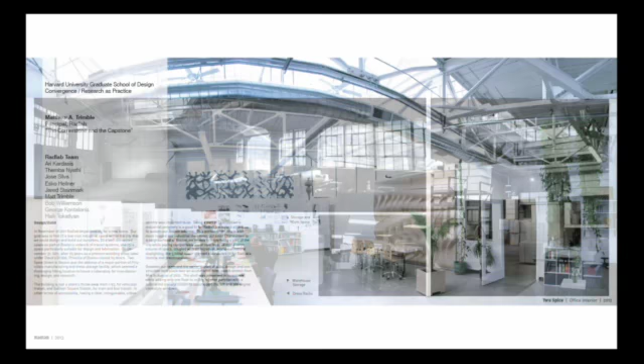The first image I want to show you is the history of the office. We're currently located in Charlestown, and the space we're in used to be a dress factory—it was where Priscilla of Boston was located for about 65 years. The building is roughly 30,000 square feet, and we occupy about 3,000 square feet of that, which used to be basically the storage, the excess space for Priscilla of Boston.

If you look at the upper left image, that's currently our studio. The big opening in the center of the image is a big white garage door that rolls up—this is where we enter the space. Above that, there's a clerestory kind of push out in the roof that brings in light from all the way around the space. On the right-hand side, you see a lot of the storage of the previous tenant in the space.

The way we decided to occupy the space, because we are an office so concerned with issues of fabrication and making, was to subdivide it according to a studio, which in many cases serves as a buffer between areas that can have dust and areas where we really don't want dust. So we have these four compartments within the office that we use to move back and forth quickly between design and fabrication.

We have what we call the clean lab, which is on the end of the office—that's where we do things like laser cutting, thermoforming, electronics. We have our design lab, or our studio, which is the red space. That acts as that buffer, and that's where things like the bathroom, the kitchen, and workspace happen.

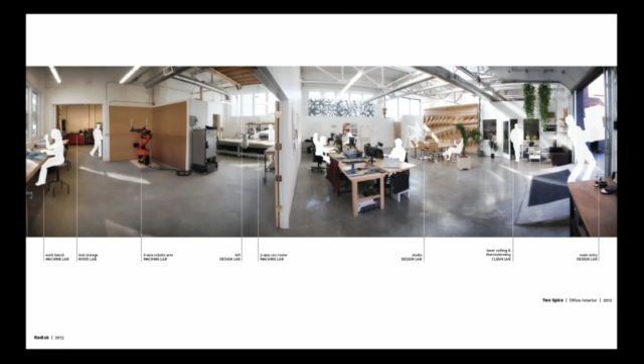So the wall that you see roughly in the middle of the image is dividing the fabrication space on the left and the studio space on the right.

So there are a few very bite-sized experimental projects that I'll show you that give you a taste of how we view the office. It's sort of a posture about the kind of work that we do, but more importantly, the kind of research we're interested in, which is an ongoing constant wrestling with materials, with machines, with design techniques, and all of the above.

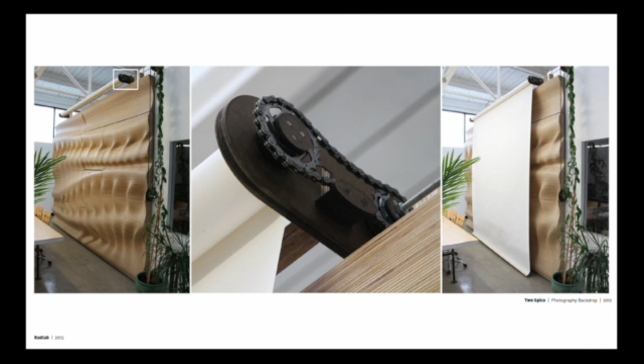So the first thing is a screen, basically a photography backdrop made out of entirely found materials, and by that I mean every single part of it. If you look closely, the top is made out of machined masonite with a bicycle sprocket and bicycle chain, connected by a threaded rod to another sprocket that goes down to a crank. This enables us to use a very large piece of rolled canvas paper to view projected work and also serve as a backdrop for photography.

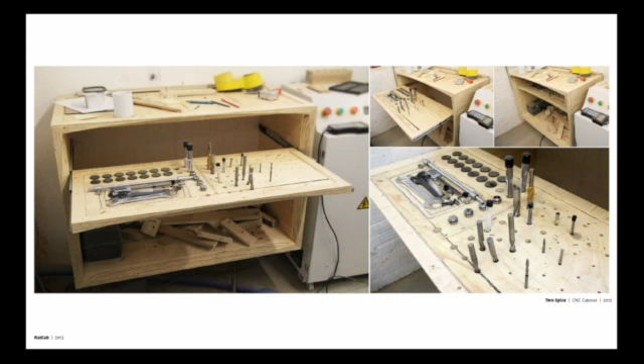Coat rack, a CNC cabinet that we can store things like collets, bits, tools, cabinet space, storage space for shelving and books.

In conjunction with this work, we've been seeing more need for material samples that demonstrate the materiality of parts that are birthed through the process of digital design processes and fabrication. So I'll show you 4 quick samples that are all material manifestations of the same digital model.

This is white oak that you're looking at, unfinished. This is Baltic birch with a water-based polyacrylic. This is MDF, one side unfinished, one side painted with a primer filler and an automotive paint. And then American birch with an oil-based polyurethane.

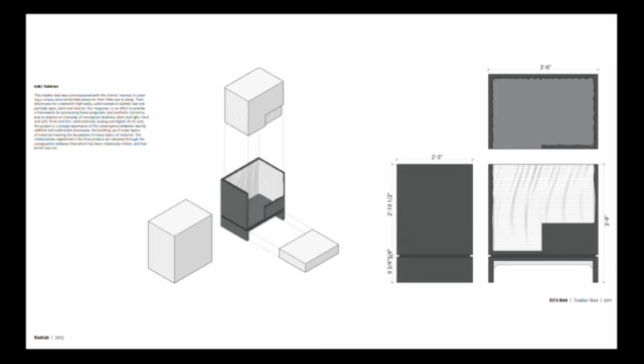The next project is reused materials. This is all kind of reclaimed plywood that we used to make a toddler bed for a client. The idea was we were pairing reclaimed materials with a research agenda we had about testing one of these machines to understand really its benefits within the context of architecture and industrial design.

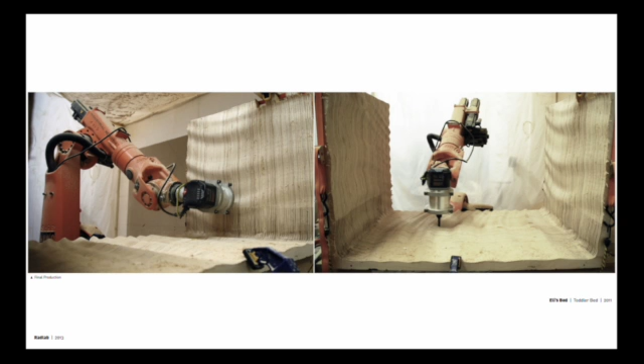So the idea was to force this machine to do what none of the other tools we had at our disposal could do, which was machining the entire inside of this channel at once. So pre-assembling the parts and machining it in one go so you get maximum clarity and continuity in the materiality of the final product.

Next project is a competition that we're working on currently. This is for the Fort Point bench. We entered a competition that you may be familiar with in the Fort Point channel. Design Museum Boston is hosting it. The materials that we used are all reclaimed, used materials, from this paper mill in Holyoke, Mass.

These are some of the materials that we looked through, all reclaimed from the paper mill that actually caught on fire last March. The building was unoccupied for years, it was dilapidated. They demolished the building, but they saved a lot of the spruce joists that at this point are about 130 years old. And that's the material we use to make our bench.

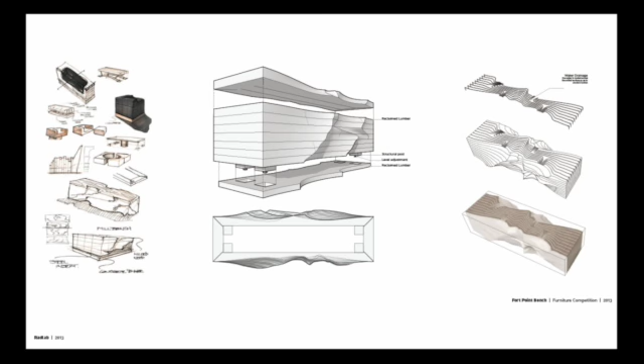Really beautiful material. The outside of this material has been aging forever, so it's got this very dark finish. But then when you go and start machining that wood, you get a much softer finish. So we thought it would be interesting to explore that, looking at things like erosion and thinking about starting with kind of the solid prism, similar to the previous piece of furniture, that you sort of erode from to arrive at the final product. This gives you a sense of the process.

The next bit of research has to do with panelization. We're basically thinking about two lines of thought. One is we have a predetermined piece of geometry—it could be anything, a doubly curved surface or a flat plane—and we want to describe it with flat panels, coming up with a way of solving that problem through algorithmic means. The other is a notion that you can take a set of parts that, if they have sufficient flexibility, can make virtually anything: a set of pieces with dynamic mechanical joints that enable a designer to actually create in real time with the physical parts, rather than having a predetermined solution on hand.

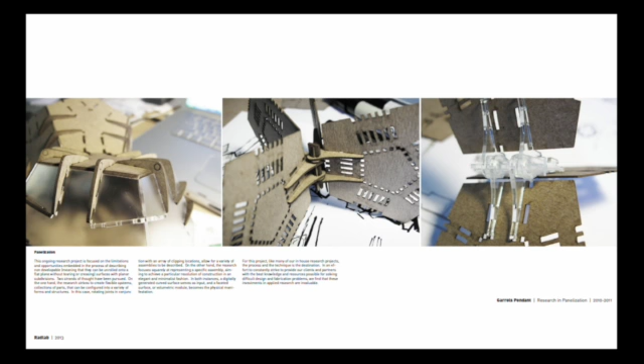These images show one manifestation of a system that allows for flexible joining and clipping in multiple locations so that you can configure in an ad hoc fashion. These next images show basically the idea of a preconceived form, volume, or space that you're trying to define using these flat stock materials.

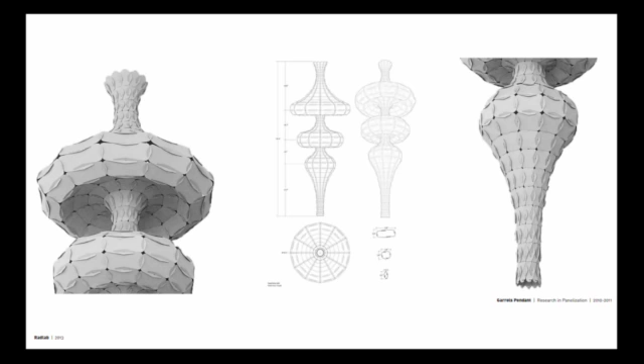Massive data sets come from pressure sensors in an athlete's foot. They're working with Olympic athletes, bringing them into their biomechanics lab and trying to understand how they run and how their foot hits a surface based on the specific nature of their body.

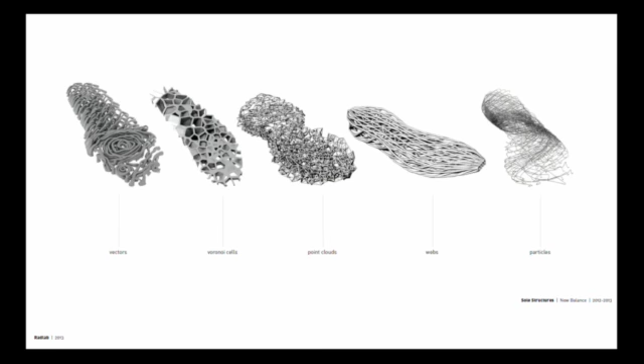We're taking those data sets and looking at a variety of lines of research that enable us to infuse form and structure with information. So from the left, you see the actual field of pressure points that have to do with vector force and direction, and that enables us to think about how to make something that isn't just giving lip service to performance-based design, but actually doing it.

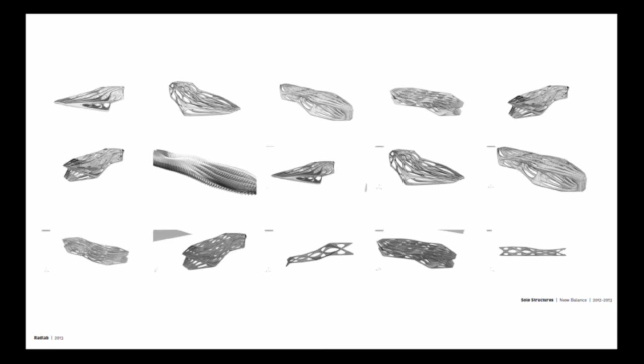The first one was based on particle systems. This is based on a more web-based system, which is particularly interesting because we're trying to work with New Balance to think of ways you can use 3D printing to develop techniques that can be made in no other way. For the last 100 years, almost every shoe in the athletic world comes from injection molded processes. So we're taking 3D printing parts inside of parts that have no physical connection—only when they collide with one another do they provide resistance.

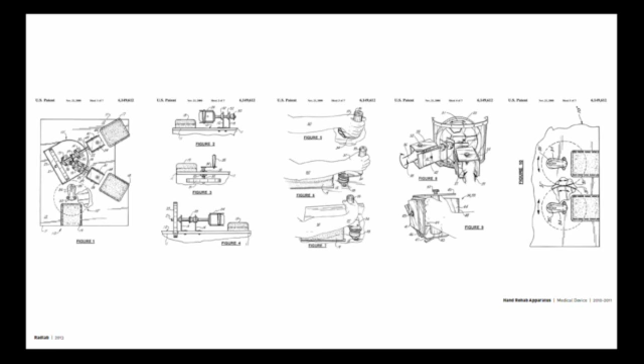A series of medical device bits of research—this is a longer one, but I don't really have time to go through it. We're working with patients who suffer from two specific conditions, one more narrow than the other: reflex sympathetic dystrophy, which means basically you have an impaired hand and a healthy hand, and you want the healthy hand to be participatory in rehabilitating the impaired hand.

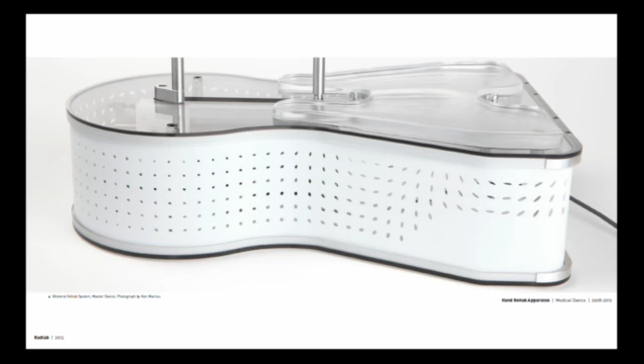So we have 3 patents filed on this technology that we've developed, and we have a project, a new prototype, that actually was just finished very recently.

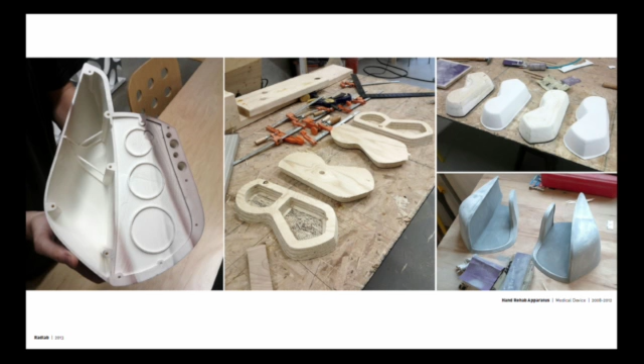Could I cue? Never mind, we don't have time for the videos. I'll keep going—a lot of the fabrication was done in-house.

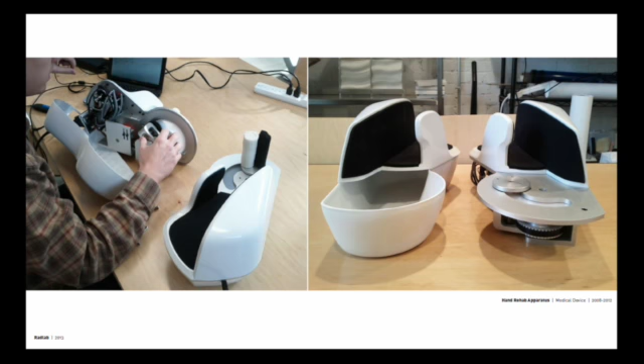We're using CNC machining to develop the molds, vacuum forming casings for mechanical parts, electronics, and technical drawings for the patent.

Finally, just some academic research with a robotic arm that we have. We've won 2 grants with the Boston Architectural College to teach courses with students at the BAC using the robotic arm in our office, thinking about things like wire cutting, pick and place operations, and weaving. This is our office before we moved into Charlestown, back in the seaport.

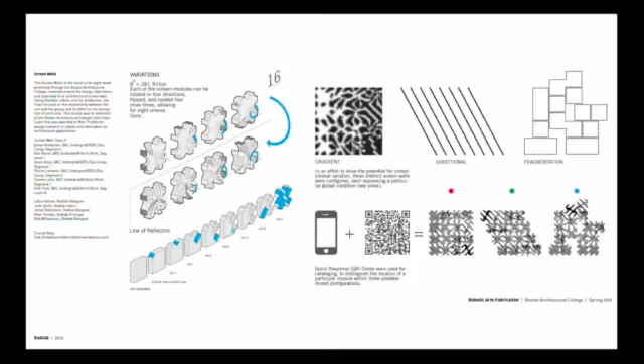A final project—if I could go ahead and cue the last video, video 4. This is a more recent class that I taught last spring, working with students to develop this reconfigurable wall. The idea is you create a matrix of 16 simple panels, and you can reconfigure them to describe very different conditions. We're looking at 3 specific conditions that the video will show.

This research project was actually exhibited at the BSA.

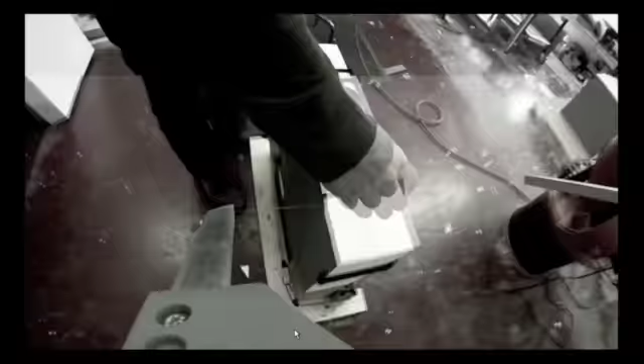So we're working with EPS foam, expanded polystyrene, a highly recyclable material, very light. The wall that we're building is about 20 pounds, so any individual person could literally pick up the entire wall. It's less about the architectural materialization, but more about the concept of this reconfigurable wall and how it can affect and impact space.

So the first configuration is about gradient. Students come back, they disassemble it, and reconfigure it. The way they know how to configure it, there are QR codes on every module. All they have to do is scan the module with their cell phone, and that tells them the configuration that it goes in.

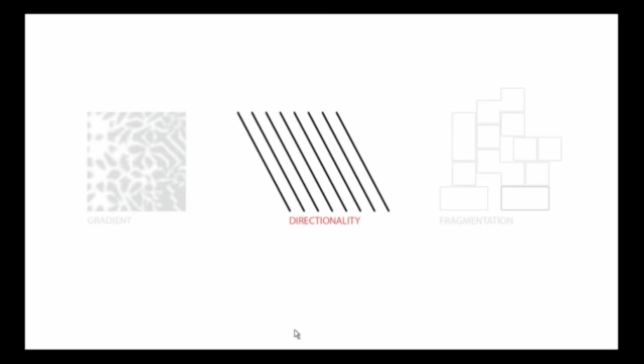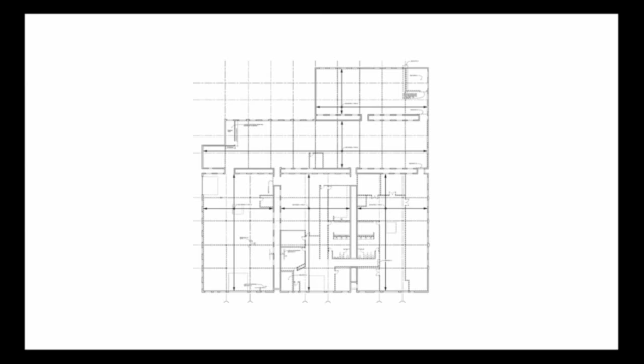It was in an urban setting of a series of warehouses originally pig barns, then used for storage. The two vertical lines at the bottom of the plan show an order, a kind of archaeology that had been lost because it was covered up—basically access points for light and air originally in the building.

However, the building was boarded up. The Mass Commission for the Blind was using it—I guess they didn't think they needed light—and this is what the space was like inside: a rabbit warren with relatively low ceilings.

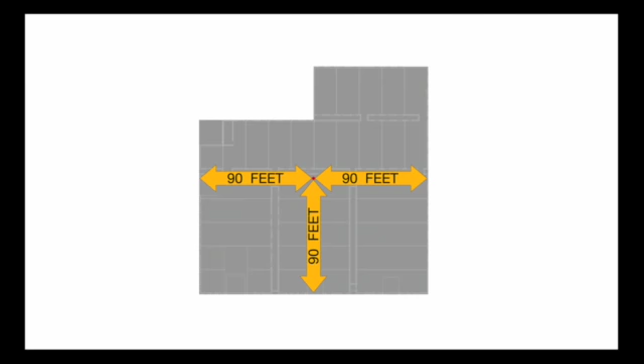One of the basic principles for us in this project was finding ways to connect any of the users with the natural environment—not just a view out of a window, but to experience wind, rain, snow, anything from the larger environment. But the problem was a deep floor plate, 90 feet away from light and air.

So we uncovered the existing order. We removed what was there and replaced it with glass, two 6-foot wide by 100-foot long courtyards, putting anybody in any position about 25 feet away from the environment.

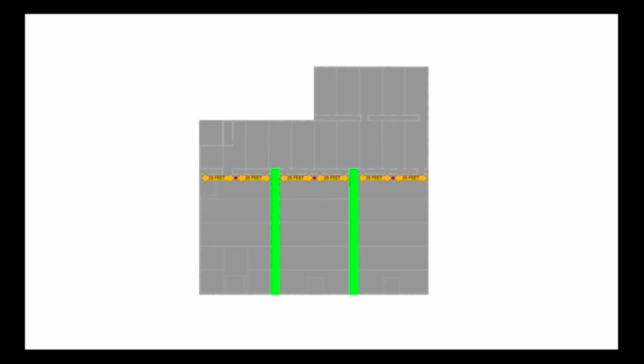I'm going to focus on part of the issue here, which was how to compress the program. This is the result of the incision of these two courtyards into the space to create a kind of opening for it.

Oh, thank you, I didn't see it. The problem—again, one of the conflicts between the desires of the owners and the space required—was...

There was a regulatory restriction: a building moratorium in this area at the time we were building. So some of the spaces they required simply wouldn't fit, and expanding the real estate lease was complex for them and expensive.

This was the second round of interviews, meant to be a quantitative one, which in some ways reaffirmed and expanded on the ethos of the client. It focused on function—the relationships between function, proximity, synergy, technology, and social order or social hierarchy within the project.

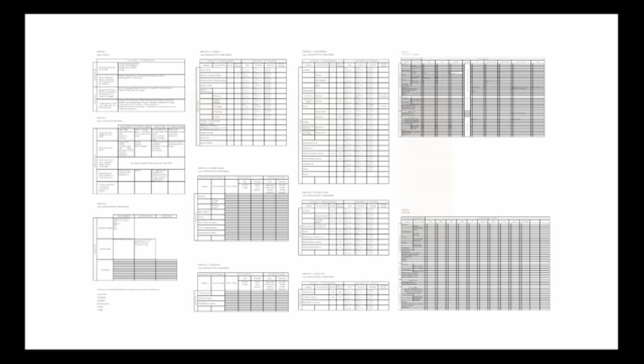So these were distributed and filled out, then interpreted by us. In the acts of compression, of which there were many, one was to take these three requirements—a library, the think tank, and an auditorium, represented by these blocks showing their relative sizes—and combine them through research we had done on the functionality of the rooms.

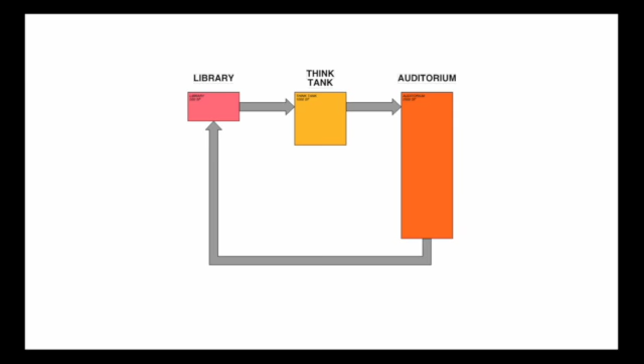We understood ultimately that none of these were going to be used simultaneously, so it afforded the opportunity to collapse these into one space, basically, and then that spun off a bunch of other problems.

The size of table that they required for the engineers was much larger than we could get in and out of the room. The solution to this was to create a room, and the table you see is just an industrial design aside that was in response to allowing this to work.

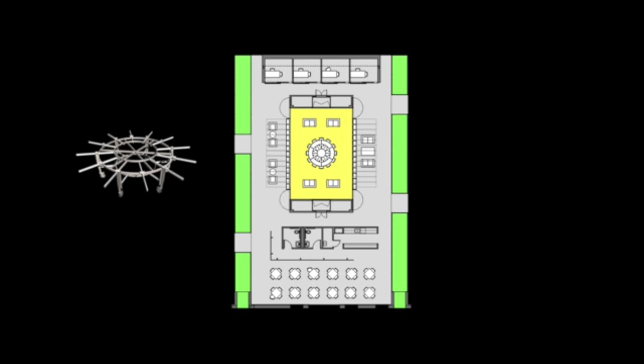By combining these, we had to do two things, since the size requirements were different. So what you see in the center is the think tank space where 12 engineers sit and imagine the future. On the outsides, combined with circulation space, are 30-foot long, 6-ton walls that carry the books.

So in trying to solve this problem, we had an idea about just moving the walls, right, and creating a larger space, an auditorium for 100 people.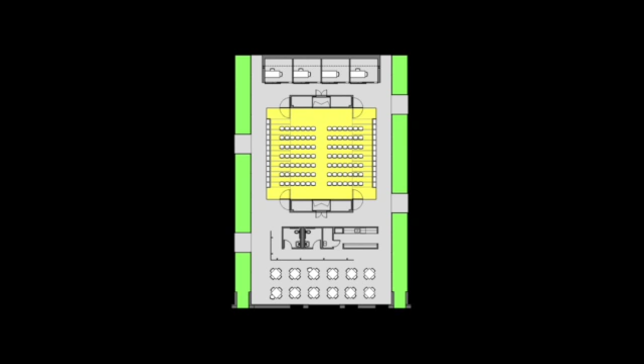In any of these events, the folks who would be involved in the think tank would necessarily be involved in any of these presentations, so there was no need to duplicate the spaces.

In researching possibilities here, we just looked at known systems of moving books.

Really? Wow, okay. He said my hair's out of place.

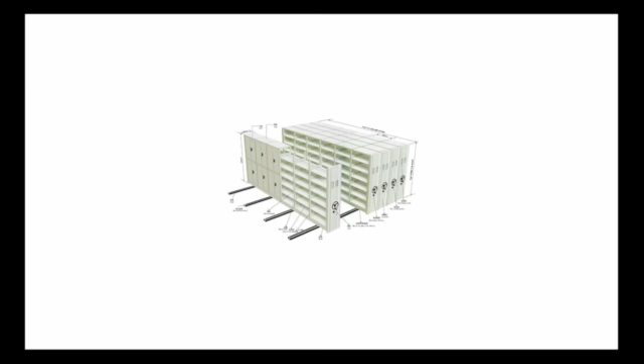So we looked at systems like this, which wouldn't work for us because of the tracks on the bottom. We developed an inverted system to move the wall out of the way. This gives you an idea of functionally how there was an industrial design component and how it transforms into an auditorium.

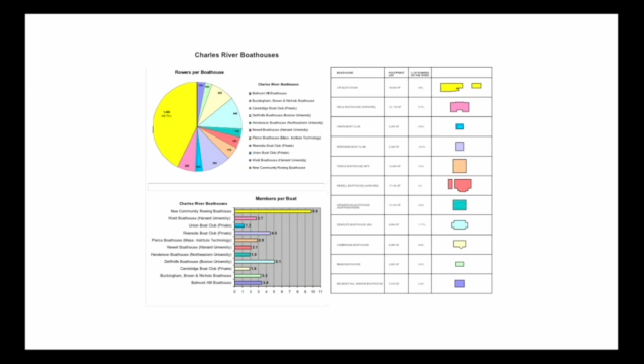In terms of the boathouse, we were confronted with a situation where we were going to contain 42% of the boats and rowers that are on the Charles River. However, our site footprint was intensely narrow and constrained.

The solution involves the large building for the long boats, a glass building that is basically a billboard for the highway of boats, and a public court in between. I'm going to go through this very quickly.

The other issue was the context of boathouses on the river, which the client rejected at the get-go because they wanted to represent a non-elitist function, essentially access to public rowing. This is sort of like the YMCA for rowers, and a first for Boston and in many places.

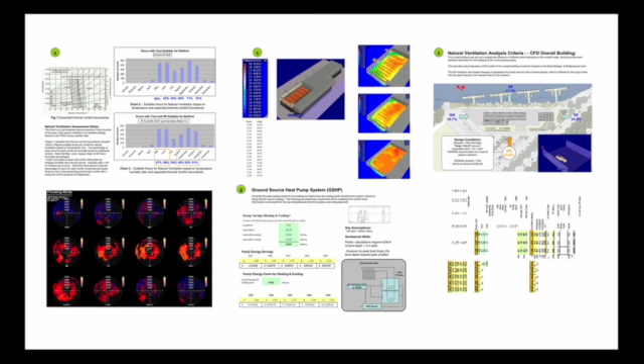Other research, which I'm not going to go through in detail, involved working with engineers, because one of the issues of a long building is drying the boats. I'm going to focus on a couple of items of research, including computational fluid dynamics, wind analysis, et cetera.

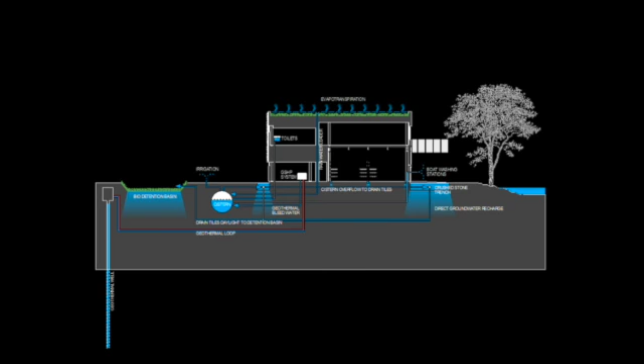Then the development of various systems, including a geothermal well, which maybe we can talk about later, in terms of how the presentation of the information was made to the client in two different ways that incited a decision - a positive one rather than a negative one, which was initially negative.

So we were inspired by a couple of mostly known things: a tobacco barn, which is a long building that dries tobacco; hangar doors, so we could get the boats out the narrow ends of the building; and then the billboard, which was meant to be glass, a Pilkington type system that would allow air to flow through glass.

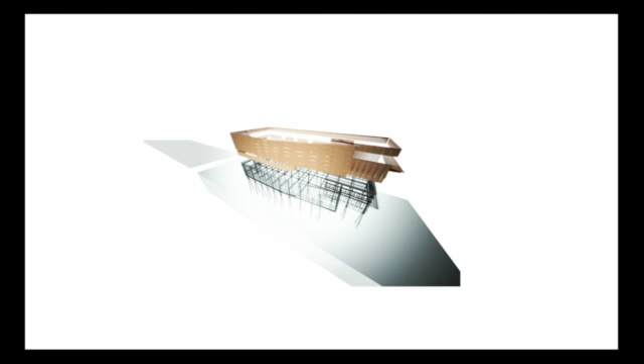The glass building is missing here, but in any case, it's a configuration that's about skin on top of what is essentially a warehouse building. So these are the developments. The Pilkington system was much too expensive - it's a relatively modest budget project.

So we developed a different way of assembling the glass, allowing air to flow through both underneath and between the panes by extruding clips so that we could cut them up instead of machining them or casting them. That's the result - we get our billboard to the highway for the small boats.

The inspiration from the hangar doors got us thinking about how the skin might be entirely dilated to allow air to move through the building and dry the boats. But we developed a rather low-cost aluminum system that allowed for doors that don't need to open as far up as a hangar door would.

Again, the components here were a rather lengthy design so that both of these went through the same extrusion. One piece is cut off on this one and then flipped over so that one extrusion works as both the moving part and the receiving part, which gets us this - a building that literally changes form. This is actually a retrofitted hangar door, modified slightly.

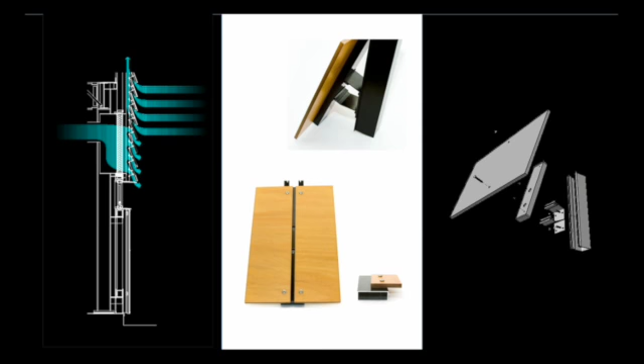In the case of the louvers, the function was to protect and cool the south wall, to allow air to escape from the hangar side, and to mask windows on the locker rooms facing the parking lot. The challenge was achieving a precision in architecture similar to a crafted building, while understanding that those building it would be installers, not craftsmen. So while these are simple pieces, their development had everything to do with extrusions that were cut but allowed movement vertically, horizontally in the clip direction, and twisting in the tube direction to allow perfect installation. There was even a small tool developed that fit into the slotted hole, forcing the screw to go into the middle, so that an unskilled laborer could install and achieve that kind of detail. Thank you.

Thank you, Alex. The next speaker is David Mah. David is principal and founding partner of Asensio Mah, a multidisciplinary design collaborative active in architecture, landscape design, master planning, interior design, and installations. The firm's recent projects include Surface Deep, an experimental moss garden wall in Grand Métis, Quebec, and Q House, an exercise in maximizing views and daylighting over a parcel in northern Spain. David.

Okay, so I guess when I was first invited to the conference, I was a little perplexed because in many ways I found it hard to say that I have a deliberate consistency in the way that we practice and the things that we do. You can see in the last two speakers a very clear consistency, one looking specifically at material research and another looking closely at architectural issues.

But for some reason, this is just a general list of things that both Lady Asensio and myself, both parts of Asensio Mah, have had to do over the years. It reads almost like a CV for someone with ADD, a mixed bag of everything from stage set design right up to airport and landscape master planning consultancy strategies. These are legitimately things we've been asked to do as Asensio Mah. So within the practice, it was hard to articulate a consistency, but perhaps all those conflicting issues we've had to deal with is a kind of consistency in itself.

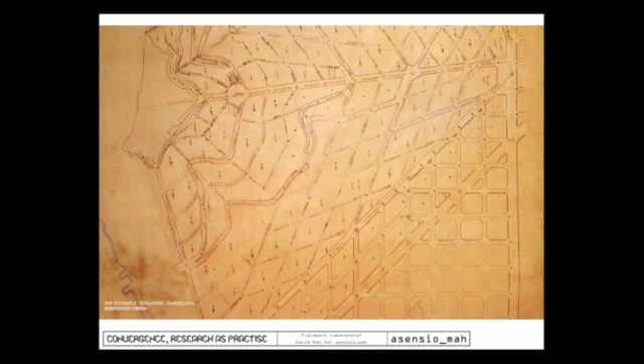We were also at the time very interested in looking at how new kinds of media would inform that search, that research, and also later on informing strategies at a larger scale and landscape scale, and how you might actually territorialize based on kind of adaptive techniques.

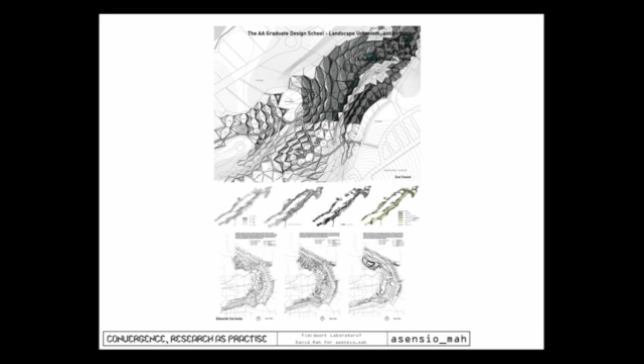This culminates, to some extent, in the kind of things we got asked to do. This is an exhibition done by the Storefront for Art and Architecture in New York recently to celebrate their 30-year anniversary, I think, where they invited 150-plus architects to take an existing New York plan and rethink it.

We were given the Mangin and Goerck plan, and we thought this was the perfect example to take all of that hard work and research that we had incubated at the AA and use this as a forum to be polemical with it.

The Mangin and Goerck plan is an early plan that was a kind of survey the city gave to these people called Mangin and Goerck. What it actually did, beyond just surveying the existing conditions, was use it as an opportunity to project how Manhattan might grow further north from its existing condition.

You can see in this case it was a bit different to the Commissioners' grid, in that it wasn't an imposition of an idealized or optimized condition, but really was trying to work with existing alignments, existing orientations, and together weave a kind of resulting whole from that.

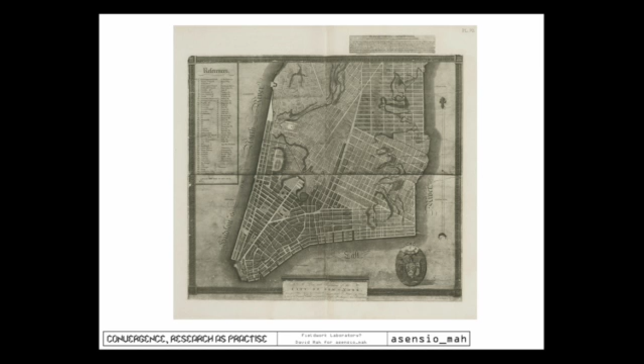We tried to use it, remembering this was an exhibition where they told us you could only spend 10 hours on the drawing, and it could only be done with one drawing. So we tried to make it as explanatory or expressive as possible.

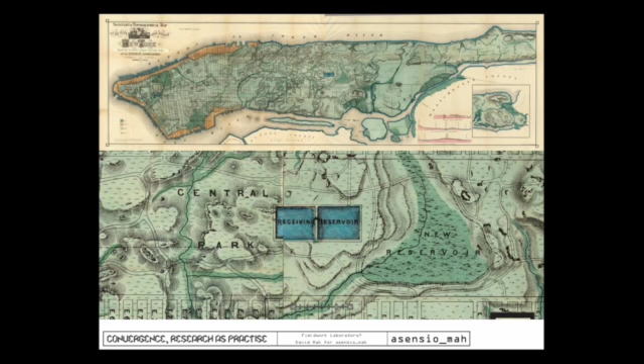We looked at the possibility of presenting an alternative urbanization of Manhattan that took into account all the existing qualities prior to its urbanization, looking at the watershed patterns and the topography as inputs to drive the grid in many ways.

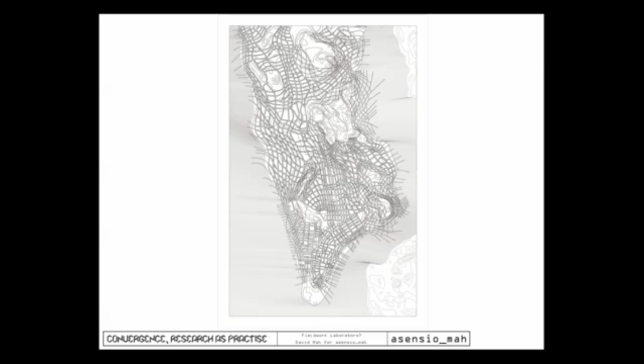It basically gave us something that unintentionally was to some extent shocking, but it becomes a kind of polemic device to talk about how, when you're addressing the issues of adaptation, in many ways you go away from the issues of optimization. Adaptation actually produces very specific, very idiosyncratic moments in an organization, and we thought that was an interesting way to describe it through this manner.

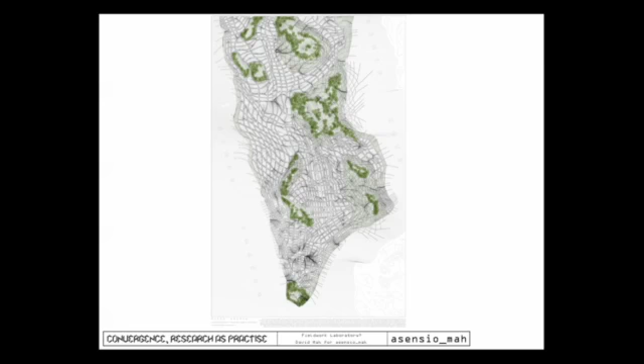Another forum where we were able to deal with the issue of adaptation in a different way was in this single-family house project we were commissioned around the same time as teaching in London, in the north of Spain. This is for a new urbanization in the periphery of a town in the north of Spain.

You can see it's a pretty generic subdivision, just equally divided parcels, and all the buildings basically fill out their setbacks and consolidate them as a single volume. In our particular case, doing all these kinds of things at the same time can't help but affect the way you approach the design process.

Rather than looking at this purely as a building that's a result of molding an object, we wanted to work directly from the existing given condition of the landscape, to some extent treating the building as a way of adapting to the landscape. If you look at it from the top it's very hard to read, but there's actually significant topography on the site.

Basically there's a 6 meter grade difference, roughly 20 feet, between the upper corner of the site down to the lower end of the site. And for us, but typically what they do in these subdivisions is they simply level out the parcel and consolidate the building as much as they can into a volume. Basically that's the result of it.

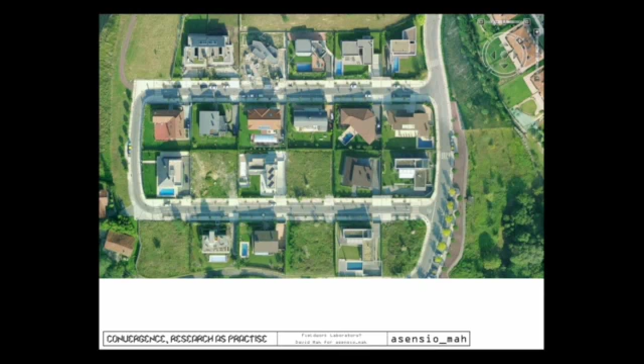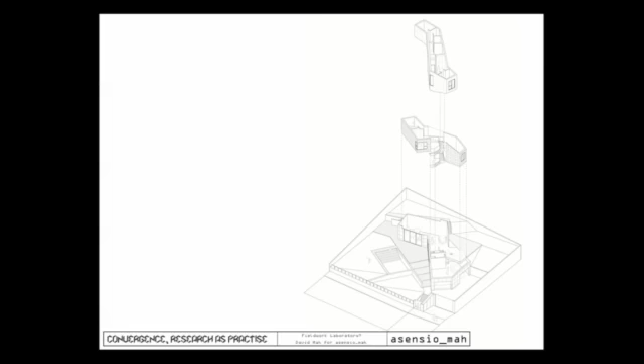So what we did in this case was really look at working with the ground, basically playing with the 6 meter difference and using that as a way to organize the program of the house. There's a grade change from the top right down to the bottom, and it reconfigures itself into a series of terraces rather than leveling out the whole parcel into a flat plane. Accordingly, the building needs to accommodate the program and position itself at many different points on that shifting topography.

This is the kind of resulting organization that comes out of that. This plan is probably not the most accurate, but it shows you the progression as you move up through the house, basically a progression that works with the topography, as all of these volumes are sitting on different levels of the site.

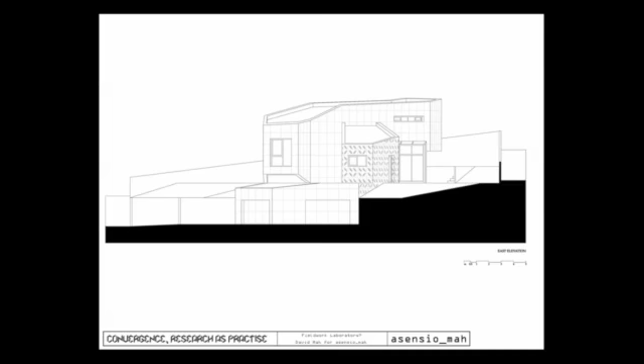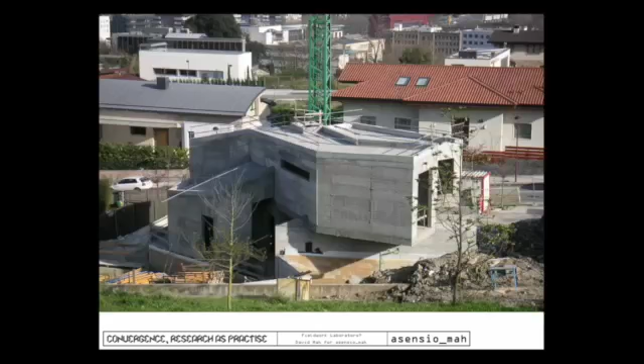So these are some sections that show that. You can see here that rather than distinct levels, you produce a series of split levels that allow for interesting continuities through the building vertically, and we try to orchestrate quite explicitly continuities between the landscape and the interior.

So you can see these are some of the views of that. What we try to do very explicitly by working with the topography is create these different platforms and distinct parts of the garden within which there could be a dialogue or collaboration with the interior of the house.

This is a view from the street and some detailed views of that.

So there was basically a hunch that working with landscape in a very explicit way, and with an ambition toward adaptation, could produce a new kind of type, to some extent, or at least a new approach to the issue of the suburban house in this subdivision. These are some details, but yeah, just to show them.

In many ways, the question of how these things inform each other—we also wanted to start basically in parallel. We also taught in this case, and this was a particular moment where we actually moved to the United States, and we started offering upper level, graduate level research studios.

In this case, we were very interested in this issue of the suburban house, and the way in which a much more concerted, focused collaboration between looking at the volume of the building and the way it works with the parcel boundary, or the plot, could actually yield more interesting lifestyle platforms or more interesting configurations—that was something we wanted to look at.

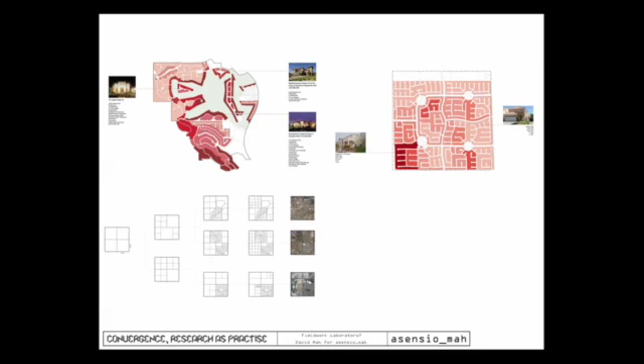So at the time we first came to the United States, we started to look at what, for us, was probably the epitome of the lifestyle economy center, which is Las Vegas. We had a research studio that looked closely at the mechanics of how lifestyle is arranged in a neighborhood. In Las Vegas, this is called a neighborhood, and that's called a community. The difference between a community and a neighborhood is the neighborhood is optimized, while the community has value added with landscape. We started to look explicitly at the types of market products and how they work with the landscape.

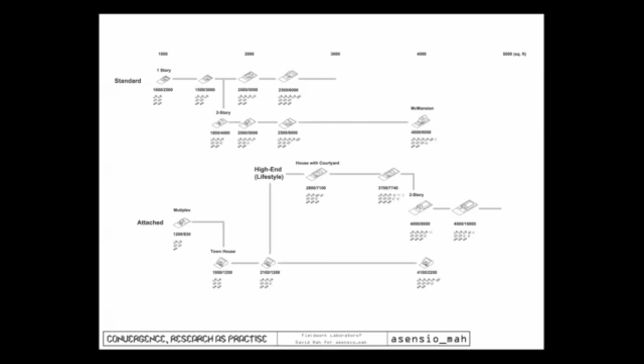So for us, this was something valuable for the studio, and also for us as a kind of research basis for subsequent projects we did. For the students, it was something they valued greatly, and they basically got a lot out of it.

And for us, it also became valuable in terms of approaching specific projects. This is a project where we moved to Australia, a totally different context from Spain. In this case, you don't need architects to do houses—in fact, you need an engineer if you're doing a house.

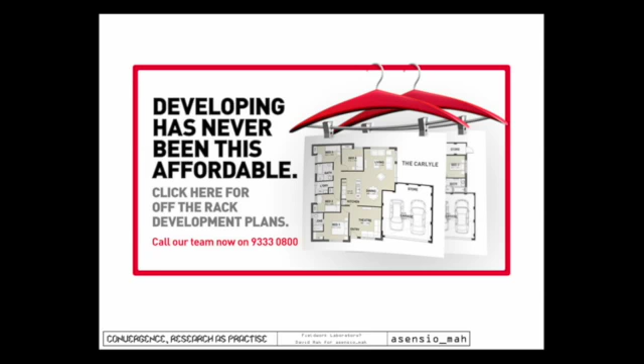So this is a totally different context, and most of the time in Australia, everything is done with standard products. We were commissioned to look at a single family house, but told explicitly that we should look very closely at how standard products are made, so we could match prices and meet expectations.

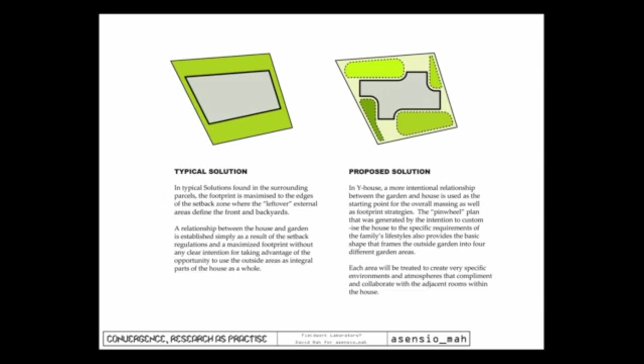So we started looking very explicitly at how standard house products are constructed in Australia—very simple issues. They basically maximize, looking at planning and the relationship to the plot boundary, a compact volume, and whatever landscape is produced is simply a consequence of what's left over. So we tried to work with a form that actually works.

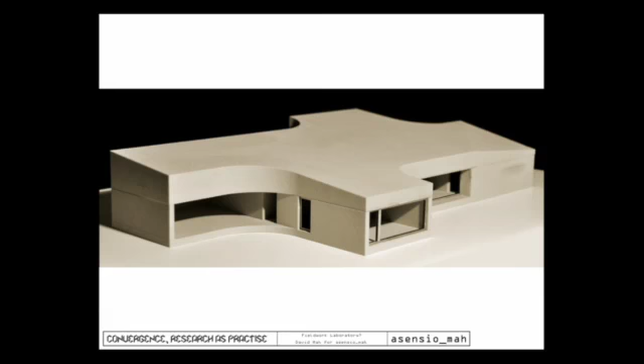You can see a lot of these corrugated edges, which were ways for them to frame certain relationships to the landscape, but in very timid ways—we tried to make that a more explicit move. Rather than maximizing the interior and leaving the landscape as leftover, we tried to increase the perimeter-area ratio and produce a figure that would more explicitly frame different aspects of the landscape.

And the other interesting thing in this project was that, halfway through, a form-based code came in related to environmental performance, which said every single exterior wall had to have an overhang attached to it. That's different from a performance-based code, which would simply let you beef up the insulation or change the material of the envelope.

But in this case it was very explicit—it was driven by a preconception of what the construction industry typically pumps out. To some extent, even architecturally, our only famous architect in Australia is Glenn Murcutt, and their idea of ecology and sustainability is embedded within this kind of formal logic.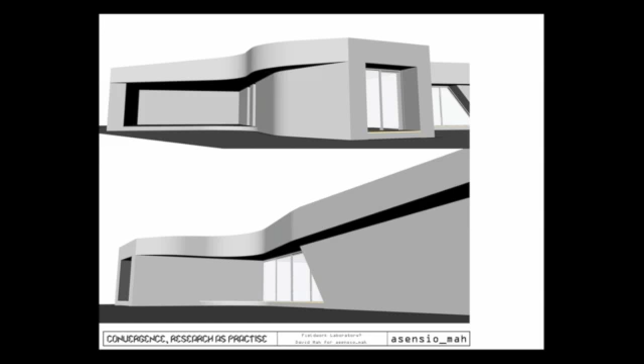So for us it became very difficult, because we were very interested in this continuous volume. These are some little tricks we tried to accommodate these new guidelines. But I think that also sparked an interest in how codes can be a kind of creative response—how codes become something you have to negotiate with in developing form.

Maybe I won't go through all of this. Do I have time? No, I don't have time?

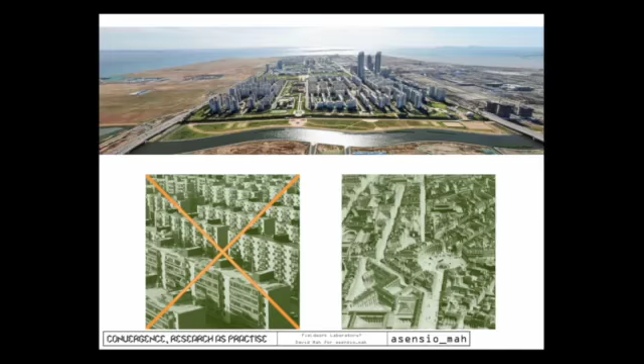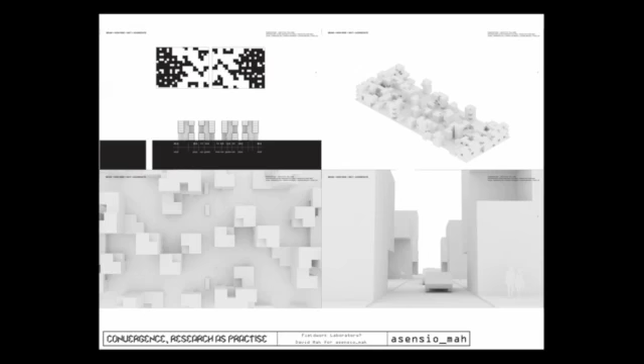So these are different projects that informed the later research studios, which looked at the issue of type and the relationship between a building type and the way it might sit within its boundary—in this case, the grid. This was something we looked at.

I guess I can't get to this point, but I was going to start talking about the object part of the talk. Okay, should I just flash the images? I'll just flash the images.

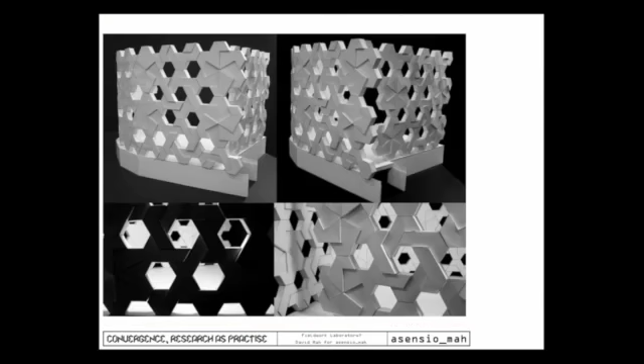So these are various things we've been doing at Harvard—this is a later class on refabricating tectonic prototypes. These are some of the things we've done, and this is something we did together with the GSD. I guess to some extent you could call this academic research, but it was a straight commission.

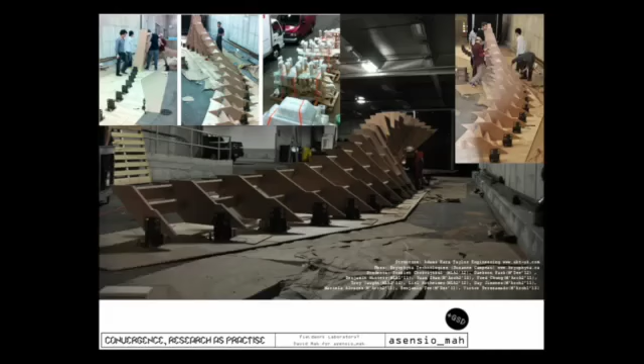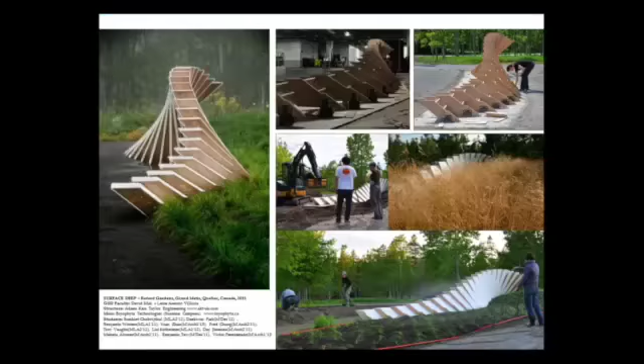And maybe we will have to leave the elaboration of this project to the discussion. But you can ask me questions about it during the talk.

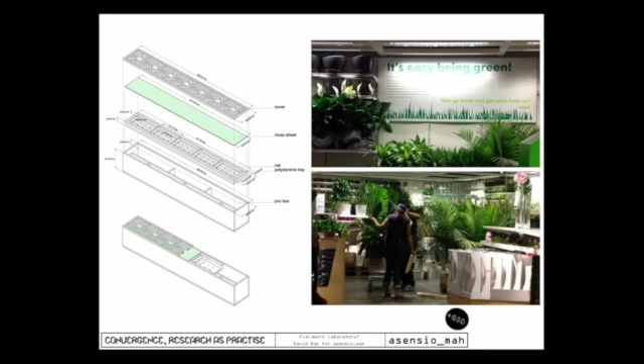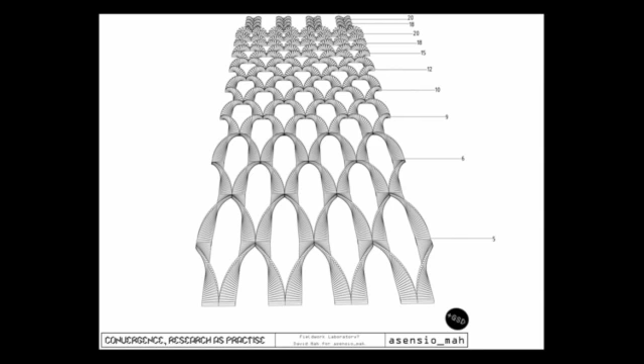This was something we did together with students at the GSD, for a garden festival. They invited us back a second time, and it was really about considering landscape as a product, looking at product design issues, and how these kinds of products can actually form microecologies.

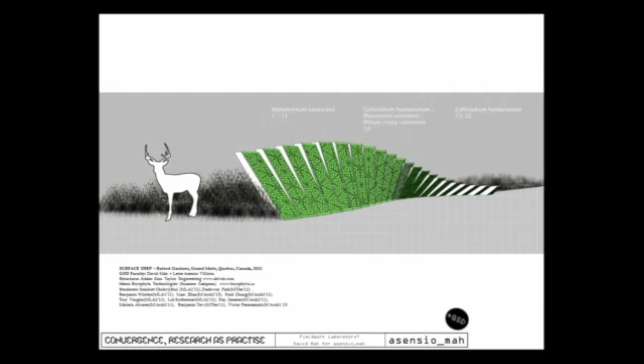If you look at the form and read it not just in terms of what it produces as a formal articulation, but in terms of how it performs thermodynamically, it also produces microclimates. So the form of this was explicitly the thing that helped us curate where certain species of moss would actually be located on that surface.

Yeah, so... sorry about that. Okay.

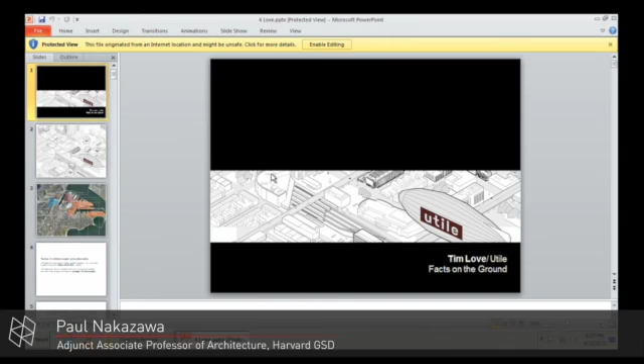From where I sit as someone who tries to help practices develop their agendas and extend them, I find all of you extremely interesting as types of practices that represent a new vector in terms of where practice can go. Interestingly, all of your practices both disrupt and extend the disciplinary discussion about what is architecture. I think that's one thing that runs through all three of your things, which is it calls into question disciplinary lines of what really can be considered architecture in the contemporary context.

There's been an ongoing split between people who say, well, there's the discipline and there's the practice, and then there's this kind of imaginary line in the sand. For someone like myself who is engaged in teaching practice, not only professional practice, which is even more specific, the legally authorized version of what practice is within the state mandate of licensure, versus practice as a notion of taking a discipline and deploying it.

What are your thoughts, gentlemen, on speculations on how you think your practices relate to disciplinary ideas? Do you really feel that you're extending the discipline in terms of where you're going with it? And what I mean by discipline is also not related to a client per se, because all of us get wrapped up in practice in terms of our relationship to a client, or a relationship to a social cause or something like that.